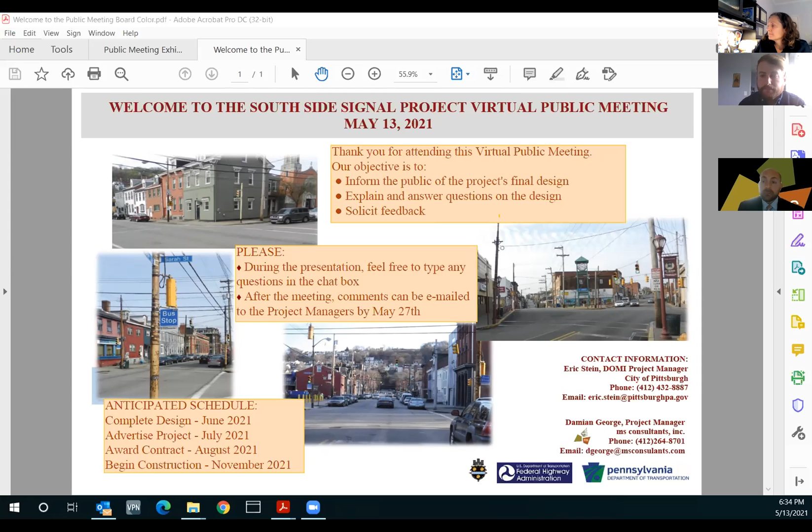Thanks, Eric. Good evening, everybody. As Eric said, my name is Damian George, I'm the design consultant project manager for the Southside Signals project. And we're going to talk about the 6 locations where you're going to see upgraded traffic signals.

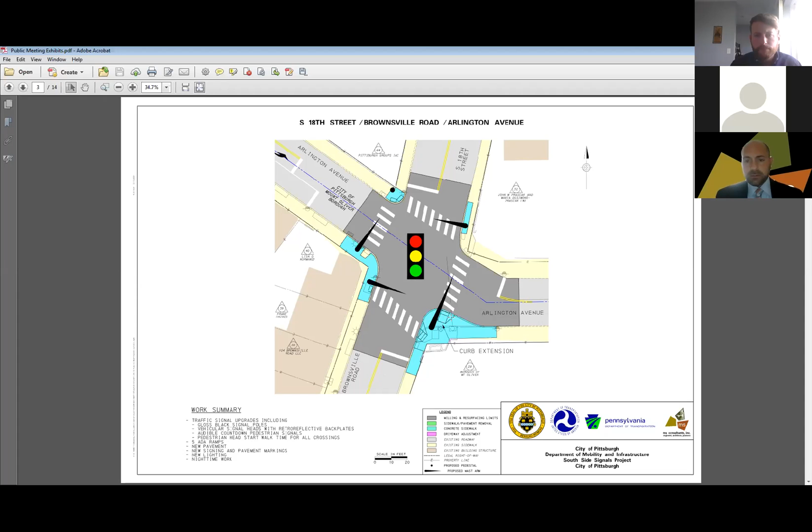We're proposing that for all the crossings at this particular location, along with updated lighting, pavement marking, and new road surface outlined with this darker gray. We anticipate nighttime work here.

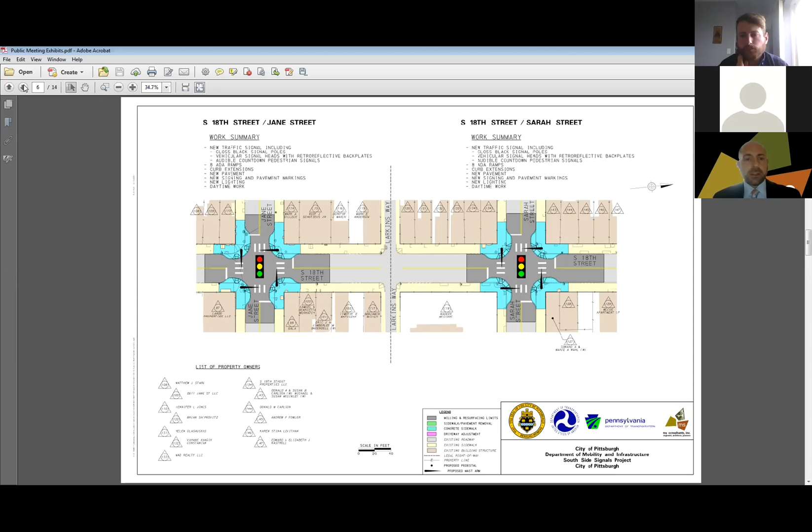So I've walked you through the new design elements that each of these 6 locations will be getting. Part of that involves the experience of construction and maintaining traffic during construction, whether it's vehicular or pedestrian traffic. I'm just going to walk you through a little bit of how we think that's going to work.

Moving over to Arlington Avenue, I talked about how we're going to be pulling the curb out here, which involves ripping out sidewalk and ripping out the curb.

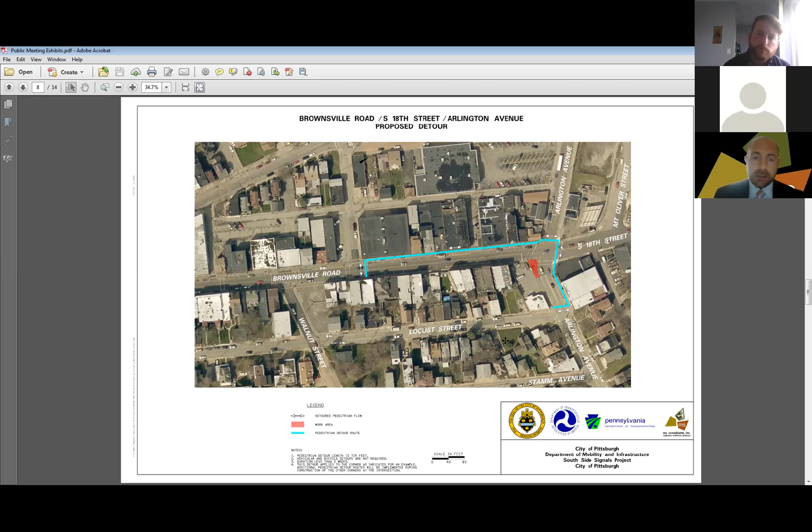And again, if they do work at other corners that require a detour, then that would similarly be posted.

And when we pick these routes, we try to keep them as short as we could, but still make them accessible where there's curb ramps, or if there's not an existing curb ramp, we're proposing a temporary curb ramp.

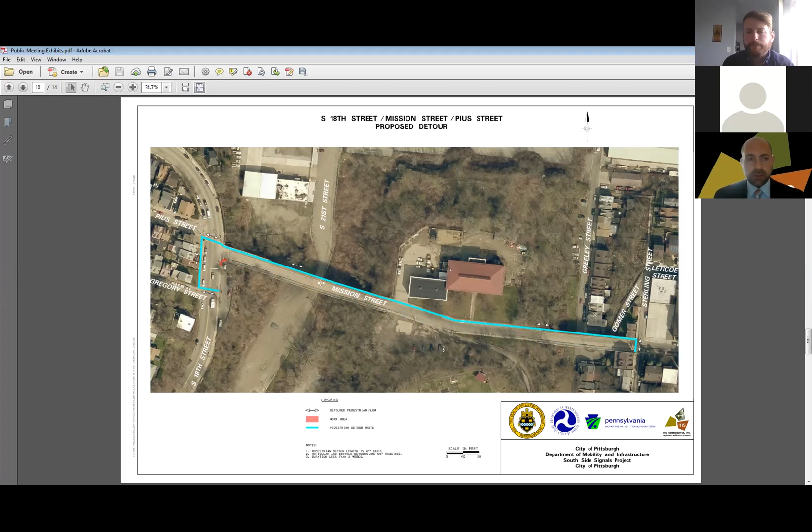And this just shows the southeast corner and then what a detour would look like for pedestrians. And then on the west side of the intersection, that's what that would look like. So it's kind of like a puzzle. You work on one corner, you detour the other corner.

And since I'm geographically in the middle of the project, I might take some time to explain that there's a larger geographical distance between where we are here at Pius and Mission, and then at the top of the hill at Arlington.

So we anticipate that when the contractor is doing work up on the top of the hill on Brownsville, that those two intersections would probably be worked on concurrently.

And then when you get down here at Mission and Pius, and then moving on to Josephine and Jane and Sarah Street, those would be worked on. Some work could happen at the same time, some work would be staggered, but you might see some sort of activity at all four of those, depending on the nature of the work. So that's kind of how we picture this happening.

And the one thing that we have direction to the contractor is that they can only work on one corner at one intersection at a time, so that it allows the ability to detour the pedestrians.

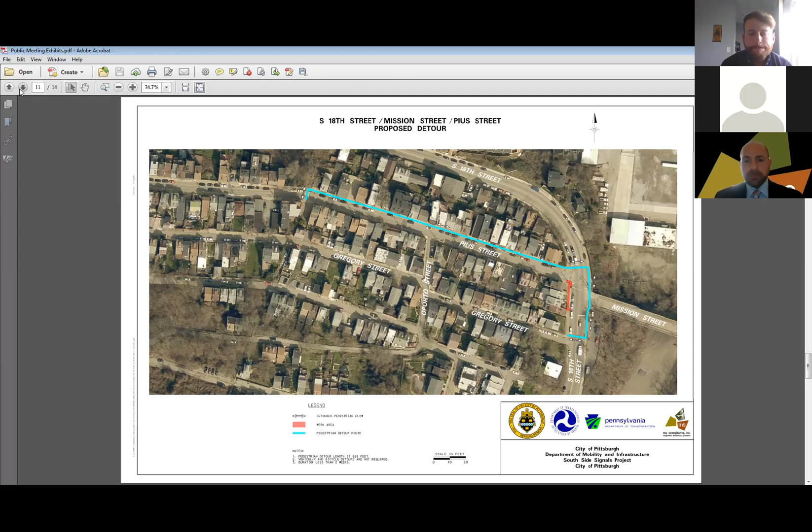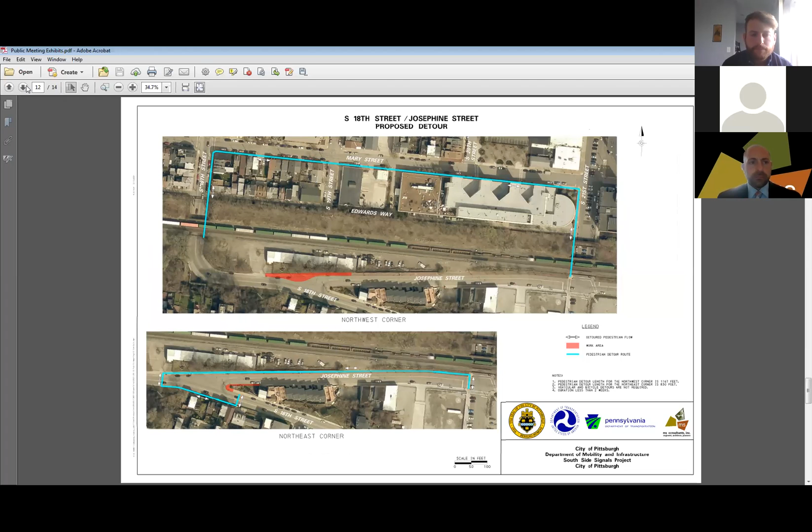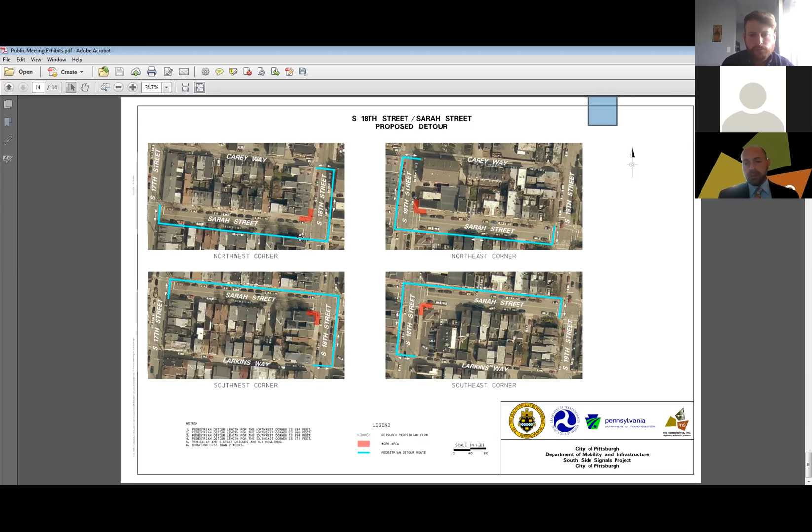So that's the gist of the design features for the 6 intersections and how we envision the pedestrians to be able to get around, knowing that this is an important area for pedestrians, in addition to vehicles.

Now, to do the curb extensions, we do anticipate flagging operations. So what that means is a flagger will control traffic, and there'll be alternating traffic where you have to take turns. And then there will be a point in time where there will be no more than a two-week detour, like when we did some of that work on Sarah and Jane Street.

So advanced notification will be provided for that, and plenty of signing to notify people of when that's going to happen. So that's the gist of it.

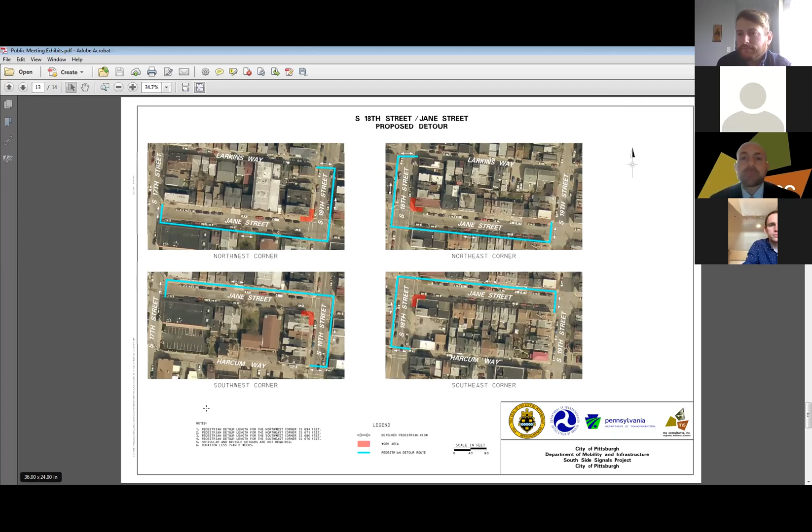Please, thank you. So any incorporations of the Bike Plus plan will be handled outside of this project. However, we were very careful to make sure that design elements within this project wouldn't preclude bike infrastructure in the future, knowing the importance of this corridor and following our Bike Plus plan. And so I hope that reasoning answers your question, but we designed this with the idea that in the future there may be some type of bike facility in this location, and whatever we do here has to consider that.

We have a question from Keith, which I'll direct to you, Damien, regarding parking at Josephine and 18th Street. I'm specifically wondering if it's 3 spots or 2 spots that are going to be removed.

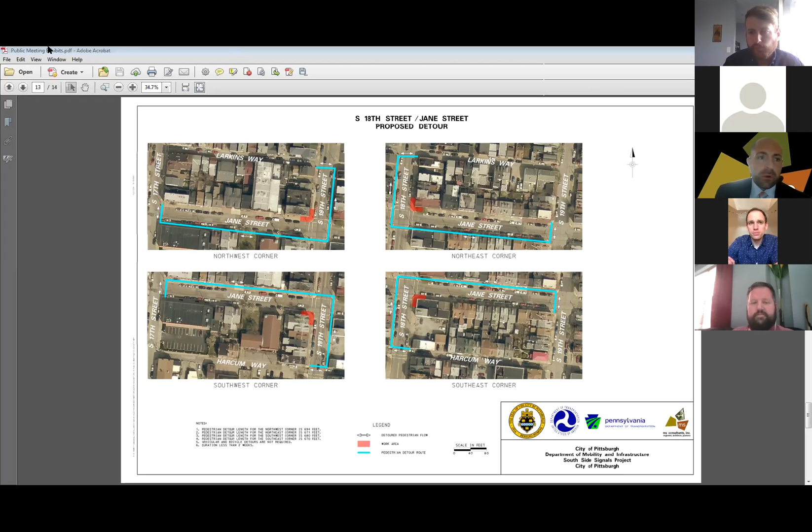Yeah, let's see, 3 spots. So the 2 spots, those were always the 2 spots that were at the north. I can cycle through to it.

So these were always 2 spots that were to be removed. Now the one parking space here that's going to be removed, I apologize, I don't remember if that was in the previous design. But when we put the sidewalk in, and looked at, like Mike mentioned, not precluding any future Bike Plus plan or anything like that, when we looked at our design, it may have tweaked from the previous design. I don't recall exactly, but this is what we end up at with a total of 3.

Okay, yeah, I see in the chat, it's the one up the street. Happy to answer any other questions. If anyone, feel free to keep on typing or speak up.

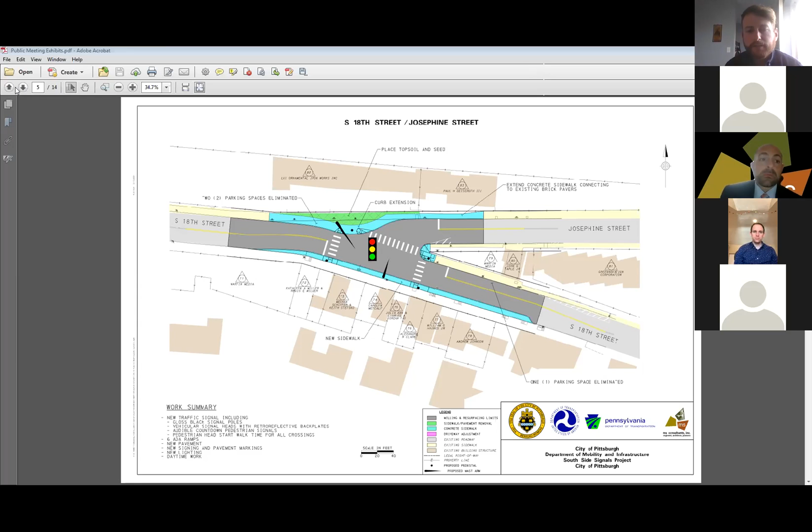I see there's a question about the sidewalk being in, and enforcement to keep vehicles from parking on the sidewalk on 18th Street. I don't know if anyone here can speak to enforcement, but we did put a lot of intent into the bump outs, the painted bump outs on Mission Street and Pius Street. Damien, if you wanted to go into more detail there.

Yeah, so the goal of that is, I think, having driven down here and parked down here myself, I think that cars tend to want to use extra pavement when they see it. And I think when people park there, they think, oh, these cars have this whole lane to use, so I don't feel comfortable parking fully on the street. The goal with pulling this paint out is to push people more towards the middle as they're getting towards the intersection, through the intersection, and continuing past that, so that when cars are on the street and not on the sidewalk, it'll better define that area.

So us in the department, we have seen some success with these painted bump outs encouraging drivers to park on the street instead of the sidewalk. So that's our hope here as well.

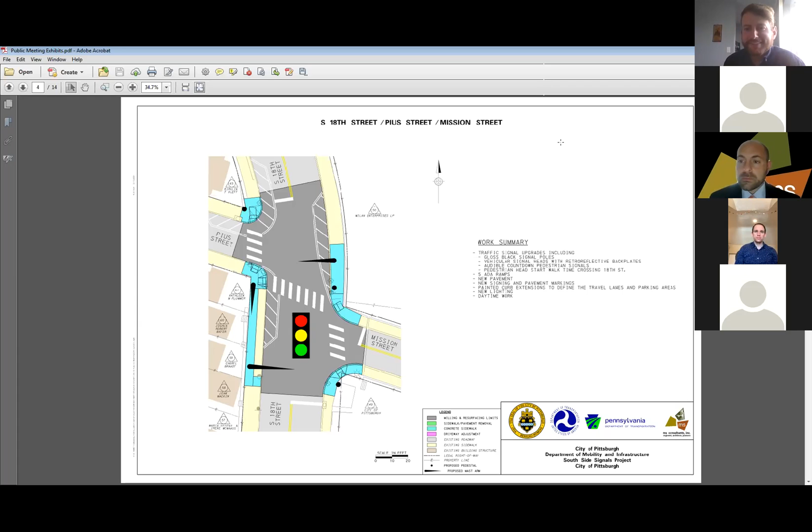Any other questions? Let's see if there's any in the chat. Okay, maybe that's enough silence. Let's move on, we can close it out.